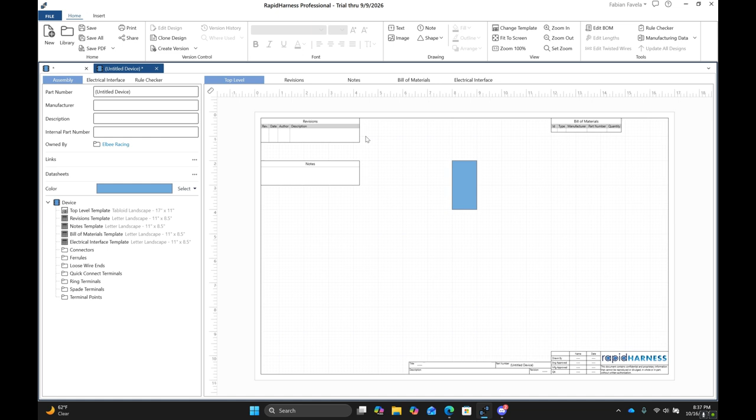What came up for me was a blue box, which I guess represents the device. Since this software really isn't a simulation tool, it's mostly just for wiring diagrams, I'm pretty sure you consider every electronic component just a black box - or in this case a blue box - which doesn't have any electrical components. It's just a blank box that you add connectors to.

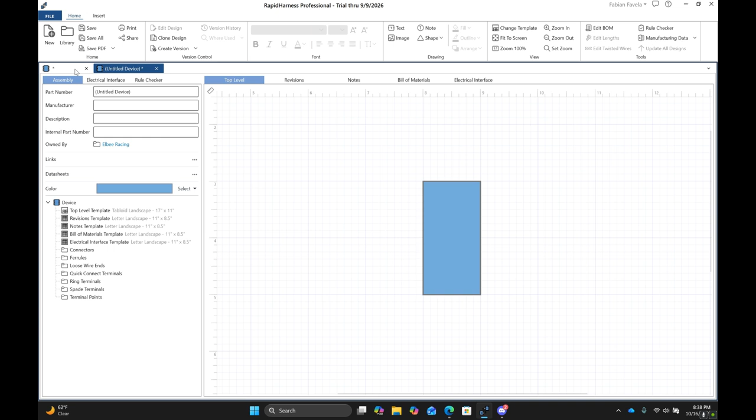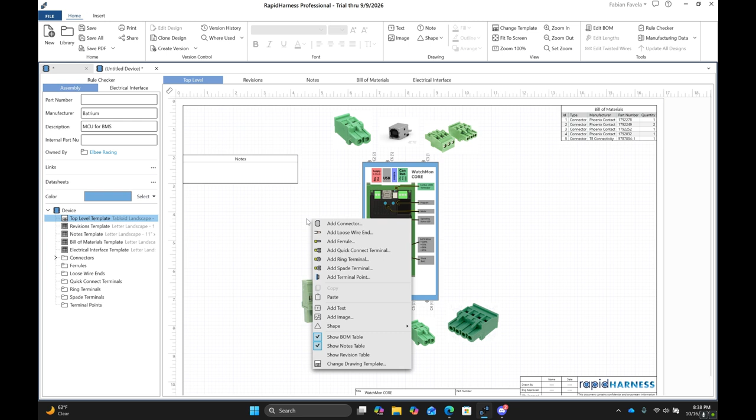So this is what I made so far. It's pretty much for the Watchmon core, which is the main control unit for our BMS system. What I did is basically use the same box that's on this page, except I attached the image - if you right click you can press add image, or it's also up here.

What I did is I just took a screenshot - let me show you. I took a screenshot of the component that's available on the wiki page.

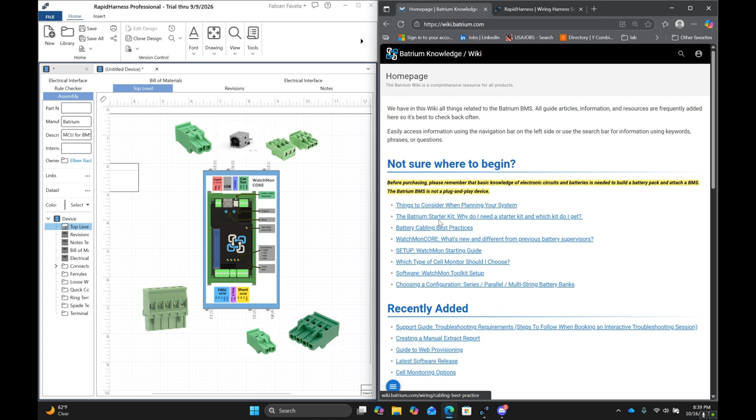So if you go right here, Watchmon should appear on the Watchmon core. Let's see - you know what, it might be easier... sorry, it might take me a bit. Oh, here it is.

Yeah, so I just took a screenshot of basically what it shows here and transferred it onto the Rapidharness, just to make it easily readable - what this component is and what each connection is for. And for the connections themselves, I mainly just referred to the wiki page.

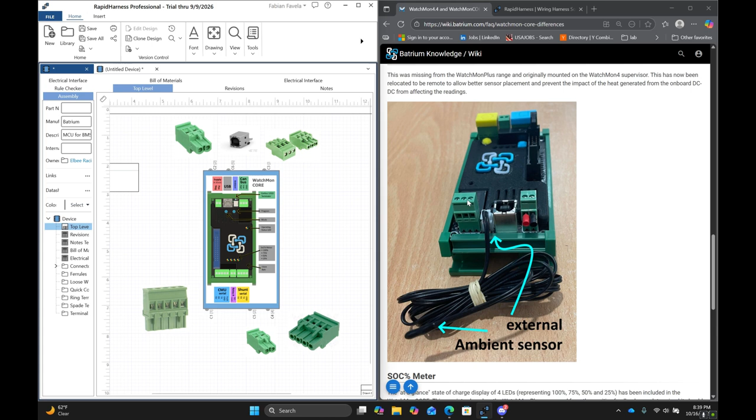Like if you go down here, you can see that these terminals seem to be what's called screw terminals. So you go search up 'screw terminal octopart'.

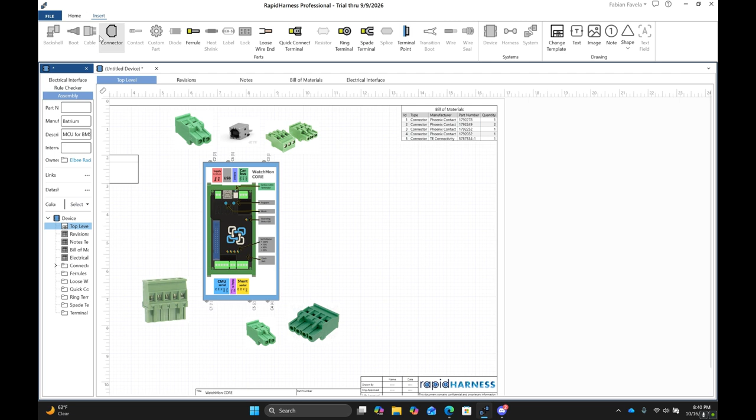The reason you choose Octopart is actually very crucial - make sure to include Octopart, because when you go onto Rapidharness it's like this. Let me zoom in. It's called a connector, and what I've been doing is just adding connectors.

If you look at what it says up here, it basically gets all the parts from Octopart, which is a platform where you find different electronic components - that's where it gets its database from. So kind of similar to DigiKey, but I think the software only gets its parts from Octopart, and for that reason you have to search up Octopart to get the right model number.

Just make sure that it's available on here. Pretty much what you do is here - I'll go back to split view. So what I've been doing is just adding connectors. First I search them up, so 'screw terminal octopart', go on Octopart.

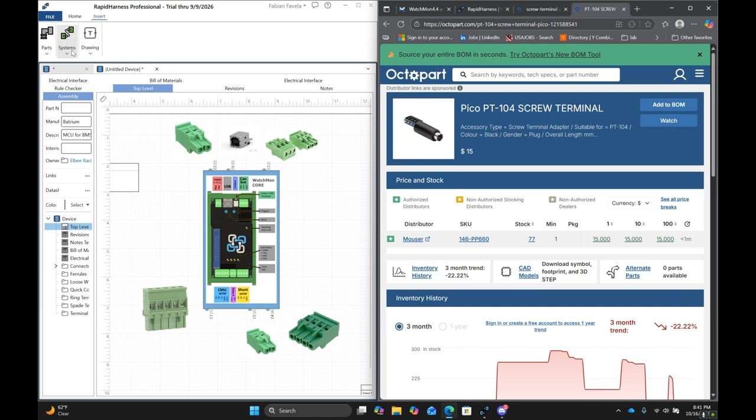It's a lot easier to search up on Google rather than on this software, because when you open this up it won't show this on your guys' page - it'll show a blank screen, and you wouldn't really know specifically what to type unless you know the exact model number, and obviously that's hard to find.

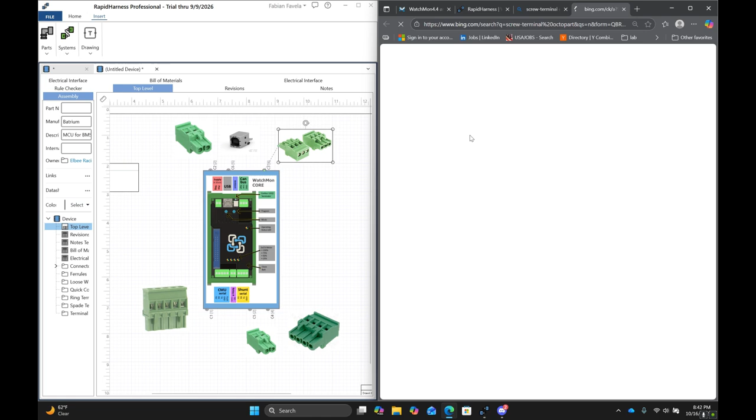So I'd just say search up the component first, or at least the name of the component, because we know this is a screw terminal, so we put screw terminal. And then right here, this isn't it, so let's look - connector, maybe. No, here, let's try to search it up on Octopart.

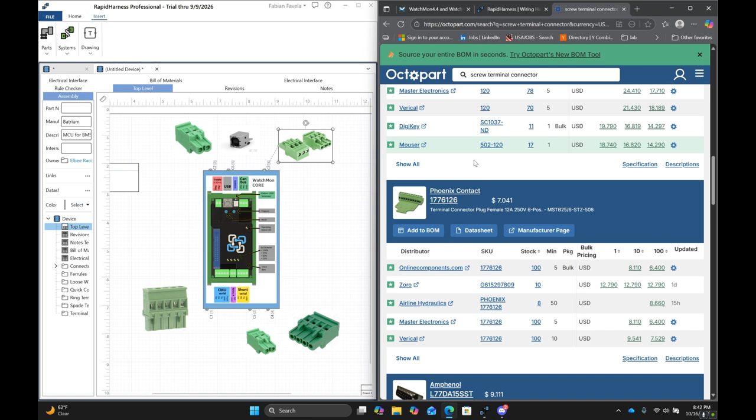Screw terminal connector. Alright, it might take a bit because they have a lot of components. Or I believe this is what I searched up - if not, then I might have to... okay, this is pretty similar.

It's pretty tricky finding the right part, but it's not identical to this - here's what you do. You find something that's at least pretty similar, and you come down here, and it gives you everything that's related to the product you want.

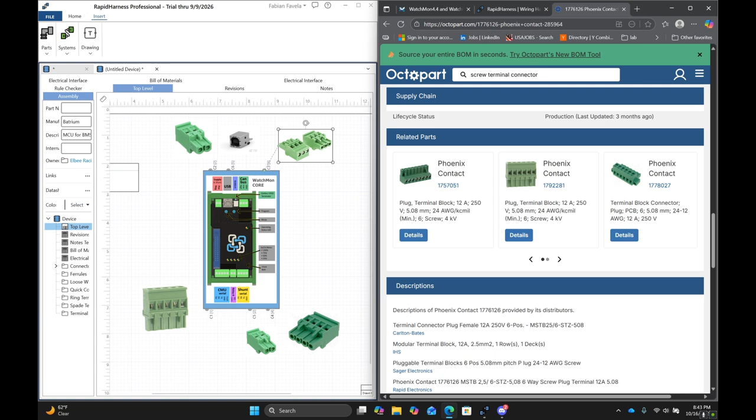You just click on this, and then you could keep going down and it'll give you more options. So that's what I've been doing this whole time - just trying to find the parts that look most like what's on the Watchmon. I'm only doing this because you need a connector on the device in order to connect it to other devices, so it doesn't have to be identical to the parts they use on Batrium.

Just relatively similar, mostly just for the pictures, so people know - okay, the C2 goes to the supply, as you can see right here. Then we'll have another device, maybe for the battery, and that connector will connect to the supply right here, and you get that information from here. Let me zoom in.

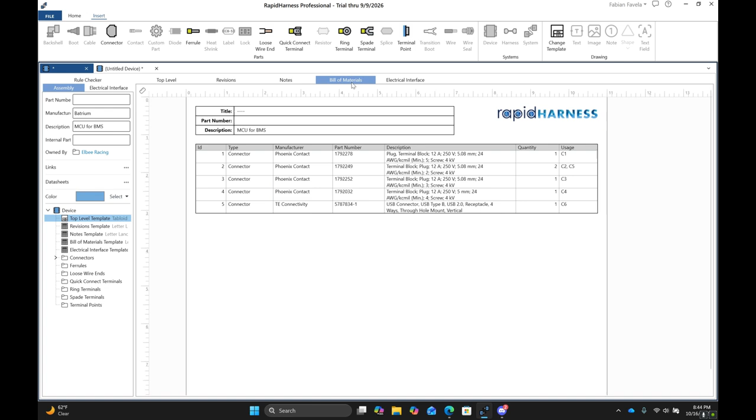You get that information from the connectors, and eventually what we're gonna do is make a harness. Let me go to file. On the harness you could have... actually, since we don't have any connections, I think it'd be hard to do that right now. Let me just show you the video.

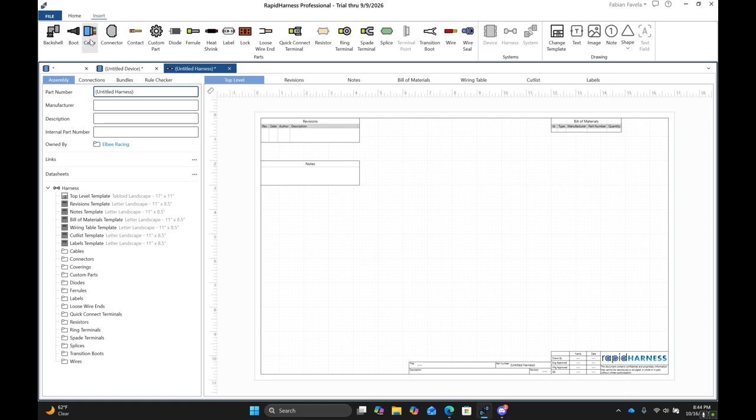Or sorry, it wasn't a video, it was this link. You just go to support, and it says getting started in 10 minutes. So you open this up, and as you can see, in order to add a harness, you have to have two different connections, like one starting point and one ending point, and that's what connects these two connectors together.

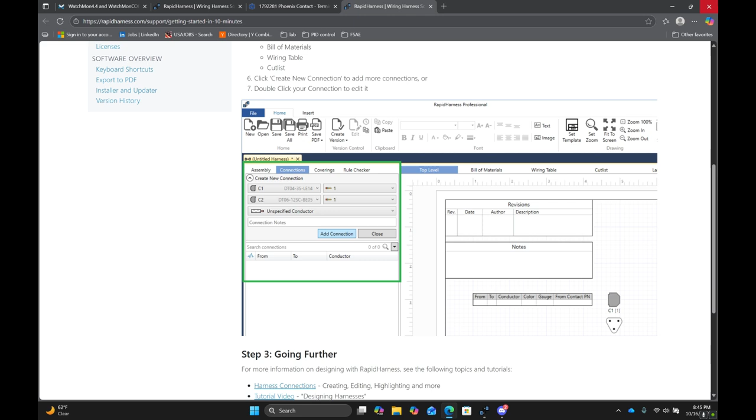And they could be from different devices. So because I only have one device, it's not really going to work right now because I don't have anything to connect it to. So, but you could see that...

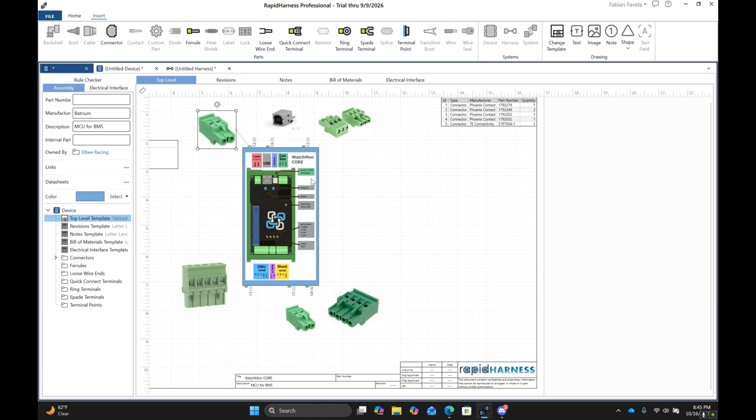C1 and C2, it's basically what we have right here. C1, or C1.1 and then C1.2. It's also shown on here if you zoom in. C1 is down here. I don't think we should really focus on the numbering too much. I kind of just did it in a random order.

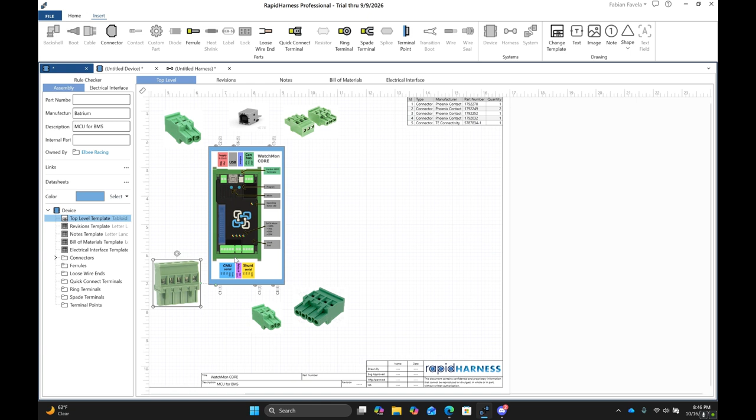Once you connect two components together, people will be able to tell, oh okay, C1 goes to the CMU, and that will connect to the cellmate, and then the cellmate will connect to another cellmate, all using the CMU cable. So you could see C2 and then C1. So I believe that is it.

As far as work, all we have to do is, I'm thinking we all make devices like I said in the last slides. You could just look back on the other slide that I posted last week, and it'll have all the components we're planning on working on. I'm pretty sure most of us already have a component that we were assigned to.

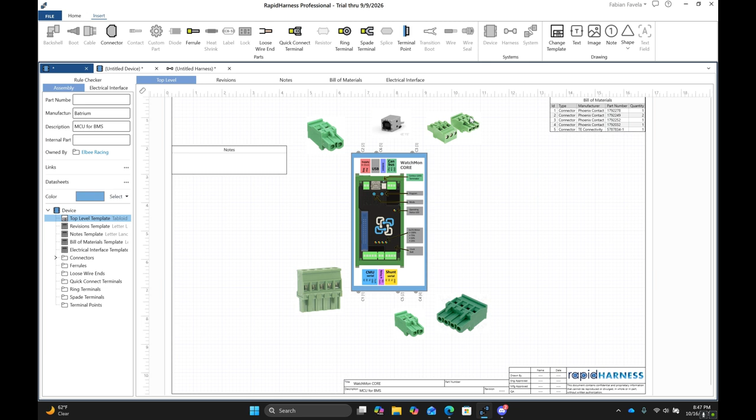So we just need to get something like this, and once we have this in place, then we could start connecting components together maybe, and we'll see how it goes. And yeah, that's pretty much it.

Actually, I forgot to add one more thing. We have to, sorry, let me discard all this stuff. We have to be able to share our devices. So in order to do that, you have to go to home, and then you have to go to a version. I don't know why it's not...

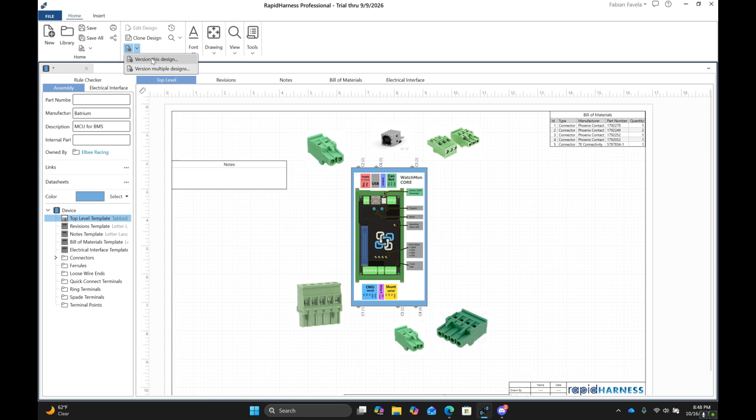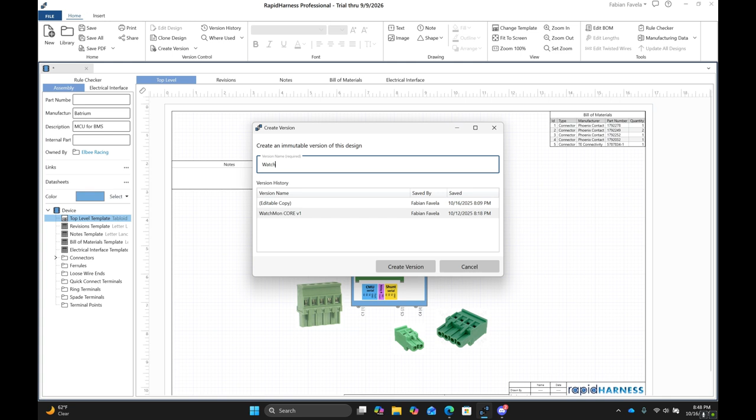Usually it has... okay, there it is. You create version, and then you apply a name to the version. So you could say, I'll just call it WatchMon CORE, and then version 2 maybe. And then you create a version.

And what this will do, I'm pretty sure, is make what I have right here available for everybody to see, so that you guys could see. I don't think you guys would be able to edit it, but you'd be able to see what connections are for what.

So when you create your devices, you know, okay, C2, supply, and all that. And hopefully that also makes it so that you have access to the actual connectors as well, because I did notice that the connectors are shown right here.

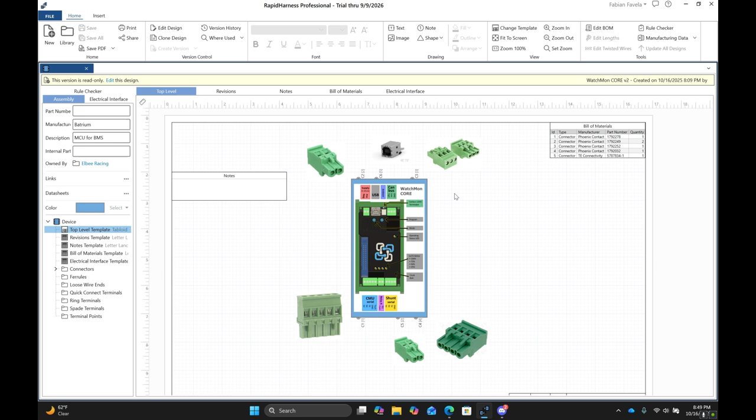So hopefully you guys have access to these connectors, because a lot of the Batrium components use these screw terminals, and I don't want you guys spending all your time trying to find these connectors, because it took me a while to find the four connector, the four connector, then the two connector, then the five, then two, then three. It took me a while, so if you guys are able to use these screw terminals, let me know.

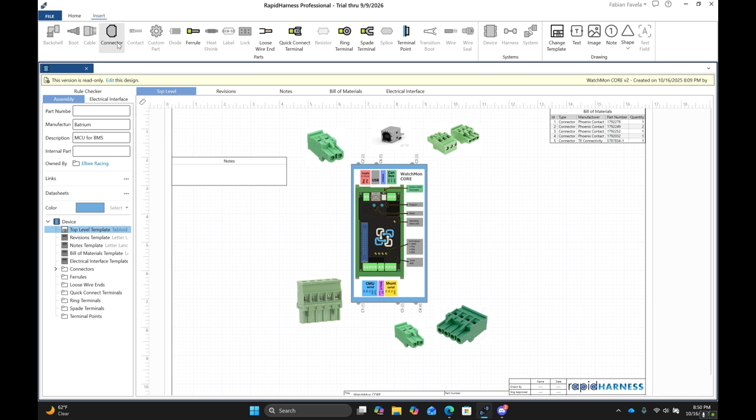Or if you guys have the information available to you as far as the part number, because I know the part numbers are pretty obscure. I don't know why it's not... oh, I think it's because I had to edit it. So I had to press edit and then add. Yeah, okay, so these numbers are pretty...

Or you know what, just take a screenshot of this screen right here, and I'll copy down these numbers, and if any of these components are also used on your device, just make sure to transfer them, copy the numbers and search them up right here. And that's pretty much it.

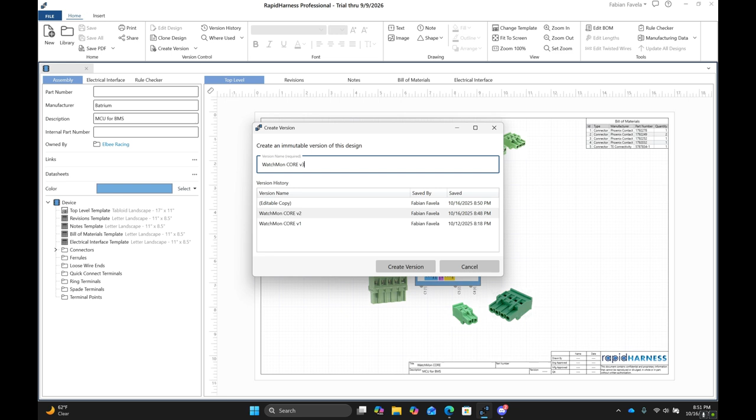I'll go do the whole process again of just creating a version, and then I have to create another version. Dang it, alright. I'm pretty sure you have to create a version for each time you edit. So it's a little annoying, but hopefully this is the last time I have to edit this, but we will see.

Create a version. Alright, let me know if this is available to you guys. It should be when you go to library and you go with maybe shared with your team, shared with you, my active work, I don't know. Let me know if you guys could see the component I made. If not, then I'll try and figure this out. But yeah, that's all.